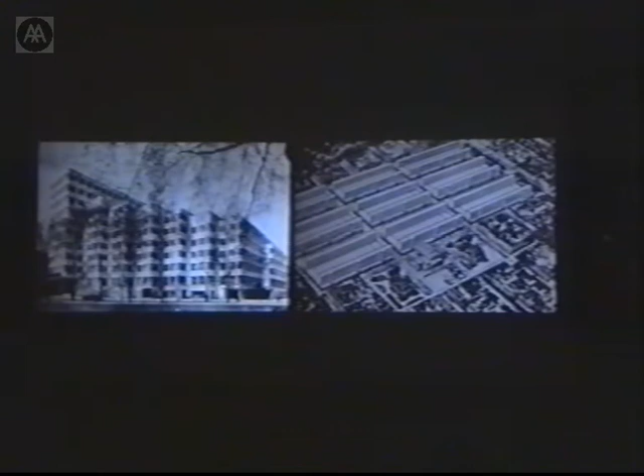A pre-war reading of America was presented by an informed European eye through Corbusier's Vers une Architecture and Mendelsohn's Amerika. These analyses advocated a Neue Sachlichkeit as represented in the industrial modernism of an expanding America, which was to bloom after the war through building programs conceived by immigrant refugee architects like Mies, Hilberseimer, and Mendelsohn. As latter-day, we strive to maintain our own external, American-educated reading of Berlin rather than comply with the internal debate that is led by Mr. Stimmann, who some of you might have heard of.

The architectural competition, while often merely a means of implementing public policy, is still perhaps the best forum for alternative position. Its role as a progressive vehicle is immediately hindered, however, because experimentation is not generally encouraged. Certainly, the competition format has the best chance of serving both idea in the form of proposals and fact through the intended production, the building, of the selected project. Yet, its corruption in the Berlin arena we see in mediocrity serving stated public goals rather than in a critical culling of ideas.

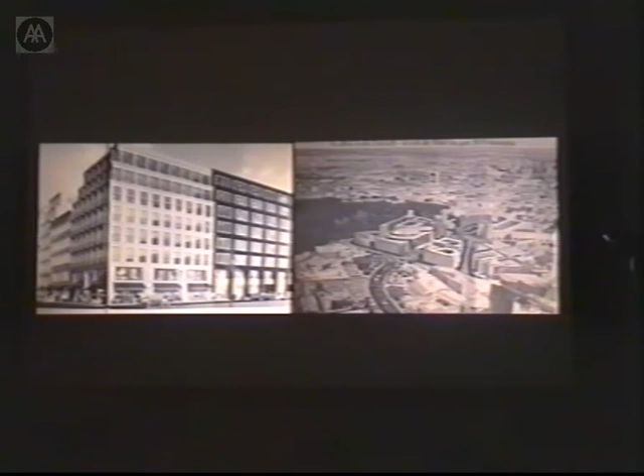The slide on the right shows the Potsdamer Platz, which is probably the biggest construction site right now in the city, and it is supposed to look like that in the year 2010. And what you see on the left is a building by Sawade, who is, I don't know how well known he is in England. In Berlin, he's one of the most important architects right now, and he's building. This is a building on Friedrichstraße.

With the rapid architectural closure of the Berlin center, opportunities for investigation shift to the periphery, geographically within the boundaries of the former East Germany. As outlined in Frank's introduction at the beginning of the year, extensive industrial tracts, housing and infrastructure built by the former DDR is largely being appropriated or destroyed through reunification.

Utopian modernism, as condemned in Stalin's warnings of the dangers of the Bauhaus, is displaced by commercial Western modernism. This sleight of hand occurs with the least means, representation made through new appearances for public consumption. Program, occupancy, plan, and space remain the same.

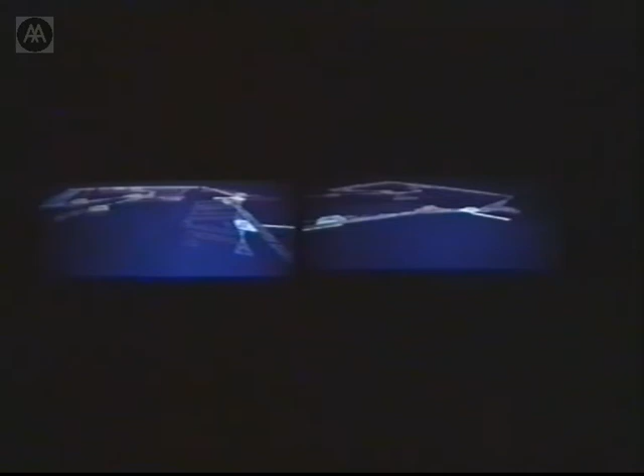Now we'll show a few examples of our own work and the work we've been working on lately. What you see on the slides here is also part of the show you see upstairs in the bar. There was an invited competition a year ago for 2 kindergartens, and we actually won that competition. I have to mention one thing: in the audience is Douglas Gauthier, who collaborated with us on this project. As I said, an invited competition we won last year for 2 projects in Berlin. Buchholz, that's the part of town it's called. You see it on those slides.

The development of the Berlin periphery is implemented through a much more dense urbanization than its counterpart, the American suburb. Within a master-planned housing complex for about 5,000 units, the brief asks for a prototypical design for 9 daycare centers within the larger scheme. The overall scheme inserted into the former agricultural periphery makes denser housing at the edge of the city, creating a circuity of 6-storied housing blocks.

The 9 Kitas dispersed through the Wohnsiedlung were to be systematically designed so that within an order that was dimensionally, materially, and functionally similar, variation could be developed. Given the potency of the ground plane in Berlin, where traces of the shifting history of the last 50 years are almost always present, our initial response was to create a counter-ground-based relief system. This idea of the ground plane and working with the landscape goes also back to work or projects we've been working on before.

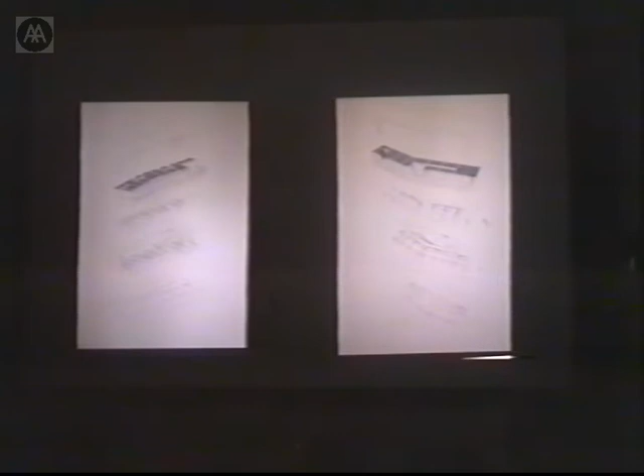Roof and facade systems are metal, fiber cement panels, translucent insulation panels, and wood windows, constituting cheap but variable systems which alter the two buildings' principal south facades. Perspectives also. I mean, this would be indicative of some of the spaces inside, this residual space to the main entry circulation hall, as well as the bands. The perspective on the right, that cut-off, extruded section ending at these layers of bars.

Additional projects that we've been looking at in the periphery also include the renovation work in Adlershof. Adlershof is a 150-year-old research complex that was the site of Europe's first airfield. Later, in the 20th century, the Nazis expanded the facilities in the 30s for the testing of aircraft parts and for Wernher von Braun's rockets. A lot of the V2 research occurred out here.

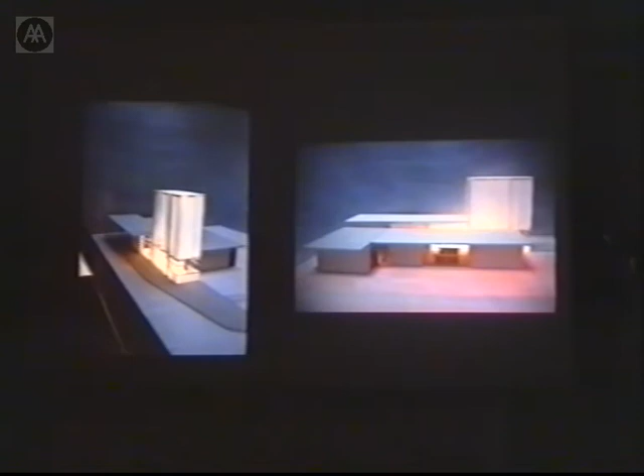Our initial project here was to reprogram the existing entrance pavilion built by the Nazi government in 1936, which is this piece far on the right, that entrance pavilion or border house as they call it. The problem was to re-present the pavilion from a control point to the park to an access point for information, in a sense, an information pavilion.

The central aspect of the Nazis' design was the construction of a pedestrian tunnel which enabled secreting documents across the Rudower Chaussee, this major traffic arterial in front, which splits the research park into north and south tracts. Our proposal was to reverse this reading of the existing structure, whereby an architecture of control is meant to be an architecture representing a notion of access to information and resources.

Counter to Berlin's planning authorities' definition of public space as a street-oriented promenade, we proposed to excavate the structure, exposing the tunnel and ramping from the adjacent park area to the basement level below for use as a bistro. This initial proposal was rejected as anti-public: this idea of a kind of archaeological excavating of the site, the tunnel running underneath this new tower piece, revealing that information as equally valid histories, against the new city planning argument for public space being more ground plane oriented or street oriented.

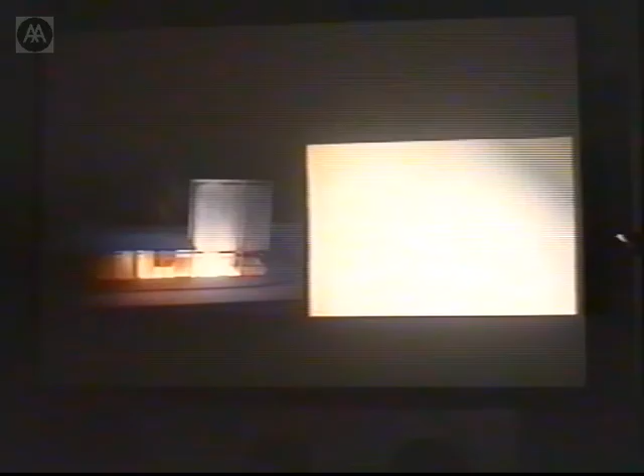As we mentioned earlier, the ambition was to create a critical refiguring of the existing structure, where at both the level of detail and space, the dialogue extends the possibilities of the architecture through an intensification rather than, again, this question of reappropriation. This on the left is an example of the facade system that we're developing in the stone systems, which are layering back to this structural steel frame.

Further projects at Adlershof include restoration and extension of the central heating plant and new turbine hall, which is much more a renovation type job. Within the realm of "Berlin must look like Berlin," industrial architecture is in any case left to a degree to its own devices. While Stimmann's Berlin, a Berlin of stone, is deemed the correct expression for public architecture, industrial architecture is allowed its traditional rendering in steel and glass and that kind of materiality.

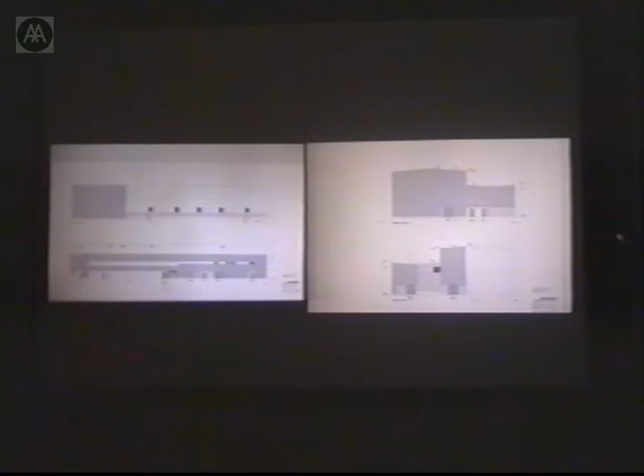Our response to the reskinning of the existing central plant is to provide a surface relief in terms of a patchwork of variable metals and glass advancing and receding within the 50 centimeter depth of the new facade. The new turbine hall is an extension; the old power plant is the building behind. The new turbine hall, deemed somewhat negatively by the city as a kind of cathedral, certainly not the first time that metaphor has been used, will use a similar cladding system. The system extends vertically, wrapping the existing exhaust chimneys. The chimneys will be wrapped in steel frames with an open steel mesh skin.

In a technological park where airplane hangars are built in the form of airplane wings, our proposal was determined to be a little too expressionistic, so they were really looking for, although it is industrial, a kind of massiveness or monumentality about it, rather than this, which they determined in a negative sense to be too ephemeral or too light.

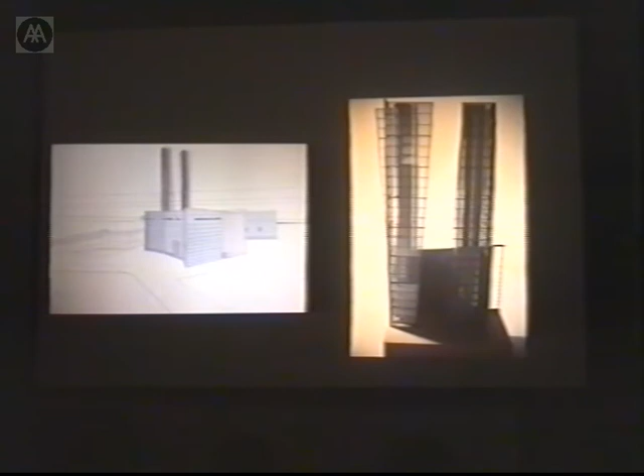Shifts to built work began with the construction of an apartment, office, and retail building in Berlin. This is not periphery. This is a much more central site here. Given the demand for housing in reunited Berlin, social housing was a likely first project. The building typical for Berlin is hybrid, stacking cars, commerce, business, and living over each other. The discussion for public space argues for an intensification through mixed use. As consistent with the Berlin Building Code of 1897, the structure grafts the broken block back together, continuing the street line and holding the 22-meter building height.

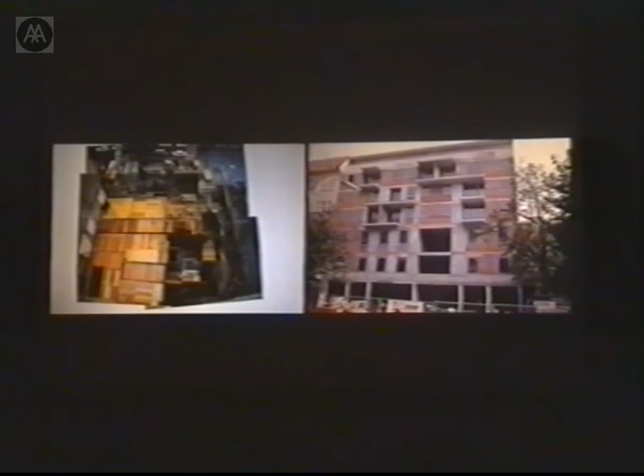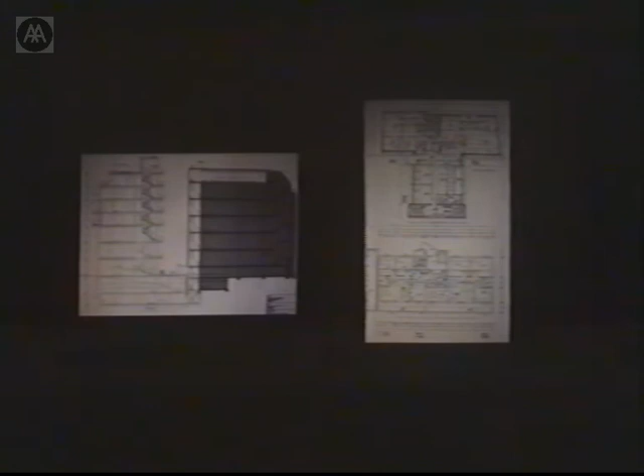The problem was also to arrange apartment types for social housing that would still fall under the guidelines for the project's financial backers, who called for 19th century apartment types as the best solution for rentable social housing. So it was struggling with some of these planning decisions, which are also often determined by outside agencies. The response was to organize plans with internally flexible spaces and to alter the plans in response to the street facade, which was also hybridized in response to the varying programs.

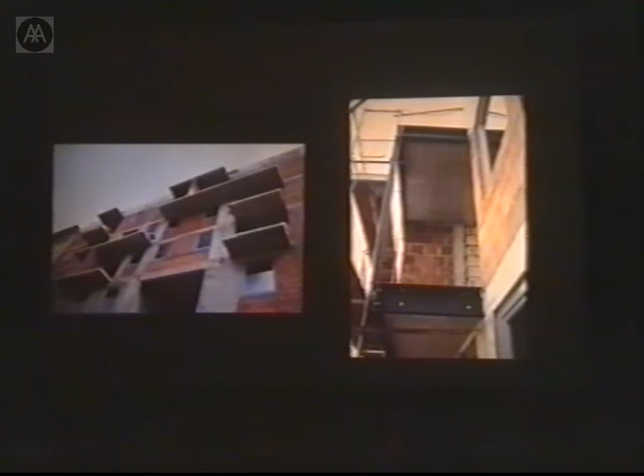The facade will comprise of steel and wood windows. Somewhat surprised at the limits of technological possibilities in Germany, the structural frame is made up of the relatively higher technology steel reinforced concrete slabs and shear walls, infilled by a typical tile masonry unit infill, which has been used for 100 years.

Our structural engineer determined the layout of the varying fields of material which puzzle together, forming the facade surface. Perhaps more particular to building in Europe is the possibility of adjusting the project during construction. Rather than via extensive procedures for change orders, alteration can be made often on the site, sketching directly over construction drawings, or as Beatriz Colomina's recent observation cites Loos's inclination to change projects on the site, having less confidence in architectural representation as the final means of determining architecture's production.

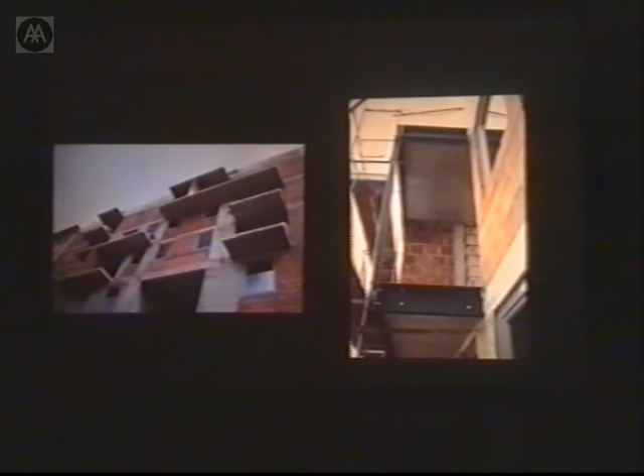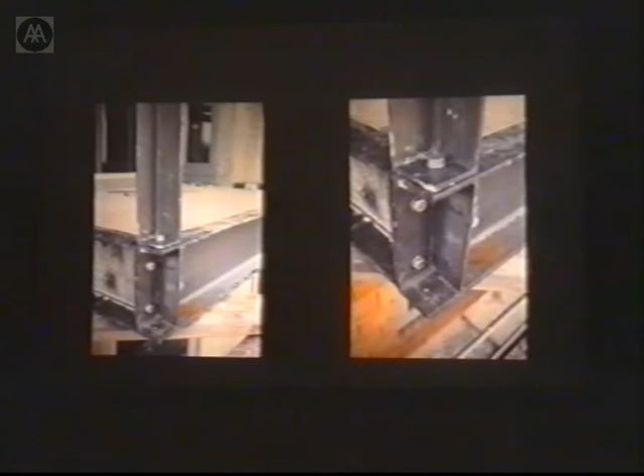We found also on the construction site that decisions affecting the design of the project carry well through construction phase, whereas Rafael Moneo has pointed out recently that when buildings enter into the realm of materiality, they become much more unpredictable. There's always some degree of unpredictability affected by material in the work of the architect. In this moment, the transference occurs that brings building from drawings to reality. And Moneo talks about the excitement of that possibility, the unpredictableness of that, but also the excitement in terms of those kinds of episodes or occurrences.

Another industrial project that we just recently completed is this 32,000 square foot addition to a German laser cutting machine tool company in Connecticut, in America. Sited within 1 hour of New York, the surrounding area is a typical office park setting, located near an 18th century colonial village called Farmington, which is adjacent to it. The brief asked for the addition to provide a new public entrance for the client's office space, a demonstration hall for the machines, and clean rooms for laser testing.

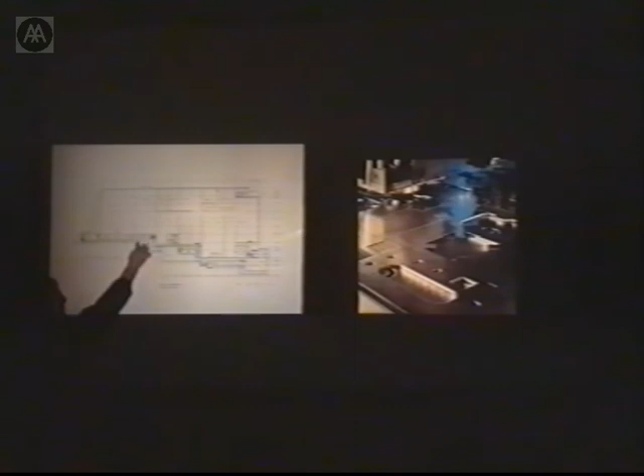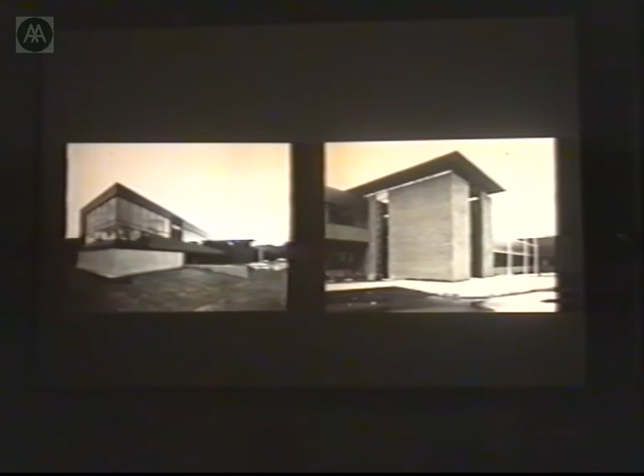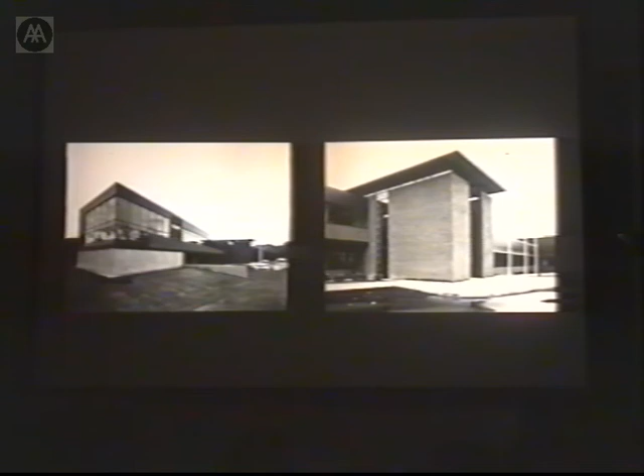Again, the client had asked for an architecture that was both sympathetic to the existing building, but would express further the technology of the products they produce. This meant combining $70 a foot, which is quite cheap, mini-mall building technology with practically the world's most precise metal cutting and forming machines. An irony not lost upon us with the technological advance of the industrial products which we were building this structure for. The parallel advancement with industrial architecture is not always up to par.

So in fact, with buildings like this, gone are the structural sections of Albert Kahn's Ford Motor Plant or Behrens's AEG turbine hall from early in this century, where architectural technology advanced in step with the industrial technology it was designed to house. For our project, the factory now in a sense is a warehouse, and the technology ends up drifting into facade systems, finishes, stairs, and fixtures.

Architecture at the level of detail peculiar to this project can be characterized by incredibly precise stainless steel infill panels of tolerances of 1 millimeter inserted into welded steel frames of almost unacceptably crude quality. Rather unexpectedly, there appeared a dynamic between these two technologies. Other sites which appeared during the project were extensive built-in and freestanding storage and furniture groups also produced using both technologies. Laser-cut light deflectors are driven typically by $20 off-the-shelf fluorescent fixtures. Told that we were just scratching the surface of what the machines can do, we hope to research this technology further on projects for this client.